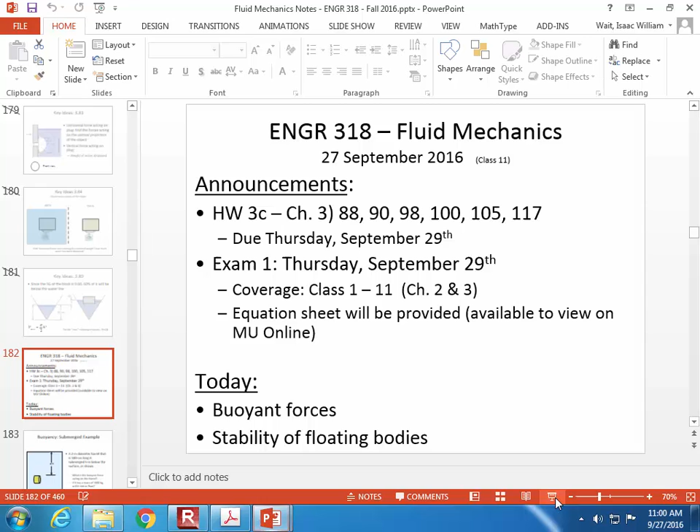You're going to have to squint a little bit more than usual. The fire marshal decided that having a few extra pieces of paper up on the window was putting us all at risk, so we're safe now. The fire marshal decided that with that much reduction in paper, we're not all going to burst into flames. So apologies if you can't see the screen.

Your homework assignment is due on Thursday, and also on Thursday we're going to have our first exam here in this room. It's 75 minutes long, and the equation sheet's already on MU Online if you want to have a look at that.

It's inevitable every semester I have students asking if the order of the equations on the equation sheet is some sort of indication of what you can expect on the exam. No, none of that kind of fortune telling based on the equation sheet will ever be successful. In fact, I haven't put the exam together yet, so I couldn't even tell you what's going to be on it. I'll probably be putting that together tomorrow. So yeah, it's as much a mystery to you as it is to me.

But it will be covering classes 1 through 11, so that's chapters 2 and 3 in the book. Any questions related to the announcements before we start talking about stability of floating bodies and a quick overview of buoyancy?

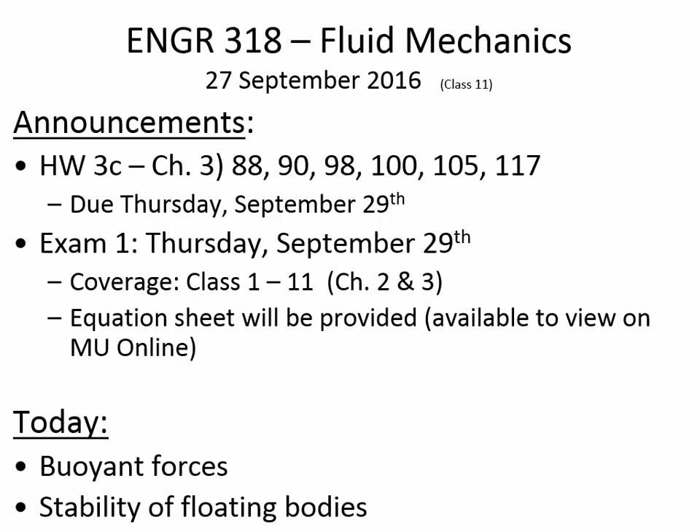All right, well the main idea with buoyancy is that it's related to the volume displaced. And then we can apply it to criteria like the weight of the object and the buoyancy to make decisions like, will a certain object that's in water sink or float?

Not every object is in equilibrium. Oftentimes if it's floating at the surface, then you can maybe, from the image, assume that it's floating, and it'll usually say it in the problem statement. But let's take this one as an example.

We have a barrel that's 2 meters in diameter, 180 centimeters long, and it's submerged 5 meters below the surface. Does it matter how deeply submerged it is? No. Why not, Stuart?

Because the wet portion is the same surface. Right, that's right. And so this is an example of information that sometimes you're given that doesn't actually play into the calculations. Just because a piece of information is given doesn't mean you have to use it in a problem. So the pressure on the top and the pressure on the bottom are both increasing the deeper it gets, but the difference between the two isn't increasing.

And so the only thing that's significant about that depth of 5 meters is that it's below the surface, it's fully submerged. So I'd like you to calculate two things. First, based on the dimensions of it and the fact that it's submerged in water—does it even say water? No. It's submerged in water. Let's assume it's water, temperature not specified. Will it sink or will it float?

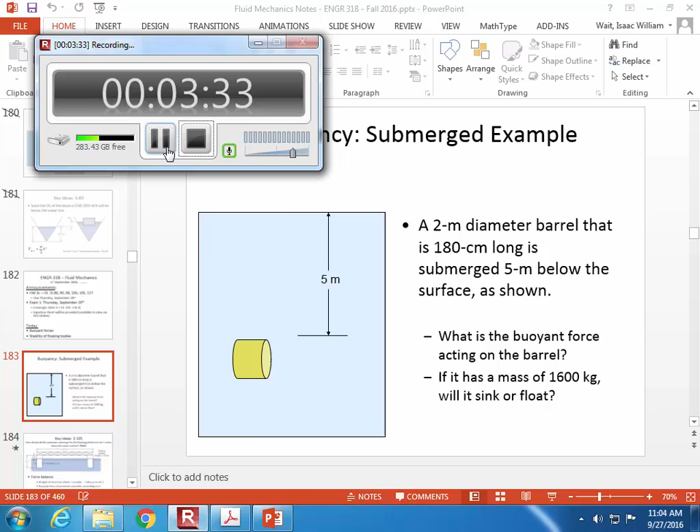All right, since buoyancy depends on the volume of the barrel, that's where we can begin. It's just the area times the length. And for a circle, the area in terms of d is pi d squared divided by 4, and we multiply it by the length of 1.8 meters since it's 180 centimeters.

And so we get the volume, and from that multiply by the unit weight of the liquid that's being pushed out of the way by the barrel, which in this case we're assuming is water. And so we get a buoyant force of 55,000 newtons, that's pushing the barrel up.

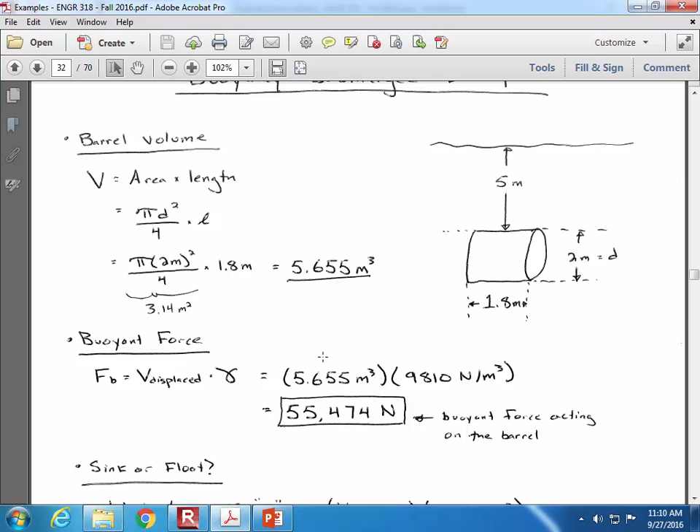Now the barrel itself has weight based on its mass, and so we can calculate the weight. It's just the 1,600 kilograms multiplied by g. So the weight of the barrel is less than the buoyant force, so that's going to mean that the buoyant force is pushing the barrel upward.

Another way of looking at it is just looking at the unit weight of the barrel relative to the unit weight of water. Kind of like how sometimes we consider the density of oil, and we know from the density that the oil is going to float on top of the water, just if the density of something is less than the density of water. And so in this case, the unit weight, which is related to density, is less than the density of water, or less than the unit weight of water.

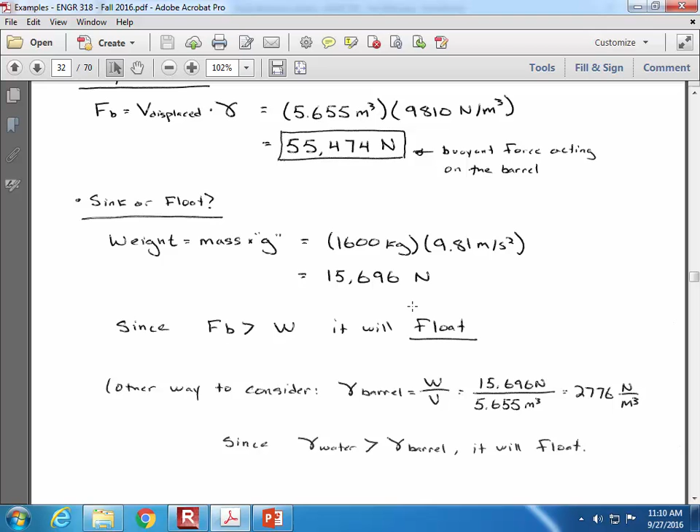One other idea occurred to me: does what we've just done tell us how quickly the barrel is rising to the surface? Because what we have is a difference in forces. The buoyant force is 55.5 kilonewtons up, and the weight of the object is 15.7 kilonewtons. So we have this equation, the sum of the forces equals ma. The sum of the forces here is that there's a net force upward. So is it just that easy? Could we use this to find out how quickly the barrel is accelerating upward?

It depends. This assumes there is no friction. As soon as that barrel starts to move upward through the water, think about viscosity and the resistance the barrel would face. It's not going to be accelerating in a vacuum. This approach would work if it was accelerating without any resistance, but in reality, the faster the barrel is moving, the greater the drag forces. As a preview of where you'll get to in the wastewater course, or whatever environmental engineering course it ends up being, you'll learn about the acceleration of particles through fluids, which is important in water treatment. So we can't just say we know how quickly it's accelerating, because the drag forces gradually increase as a function of the barrel speed.

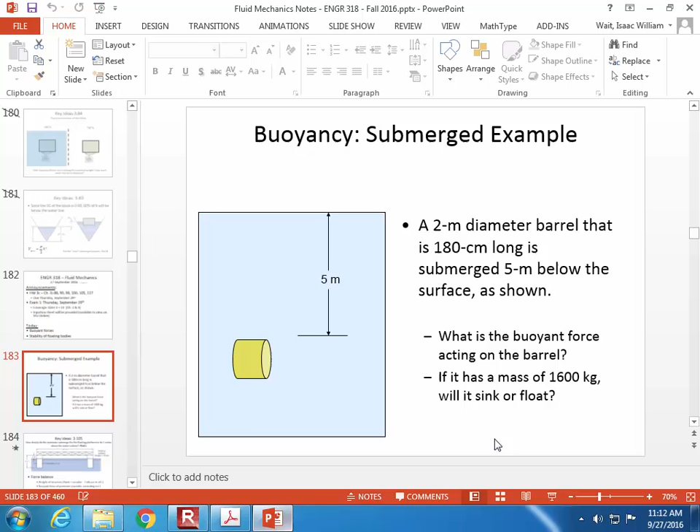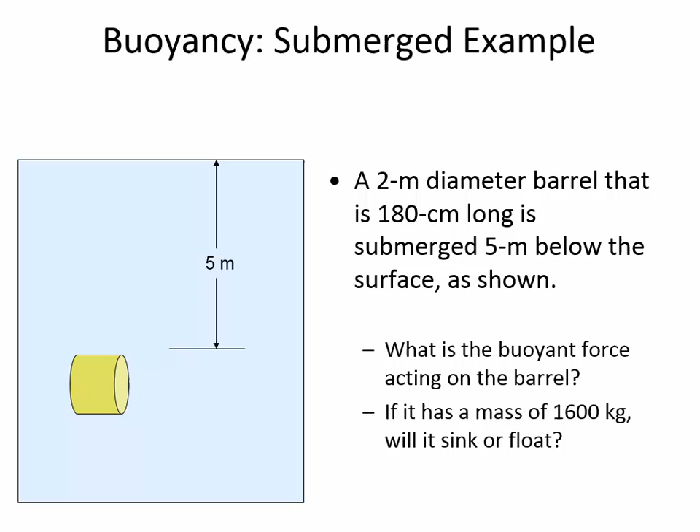But we do know that it's going to float until it reaches equilibrium. And if we wanted to, we could even calculate how it's going to be floating at the surface, although that would be a little tricky because of the shape of the circle. Any questions on the calculations you did to determine whether it would sink or float?

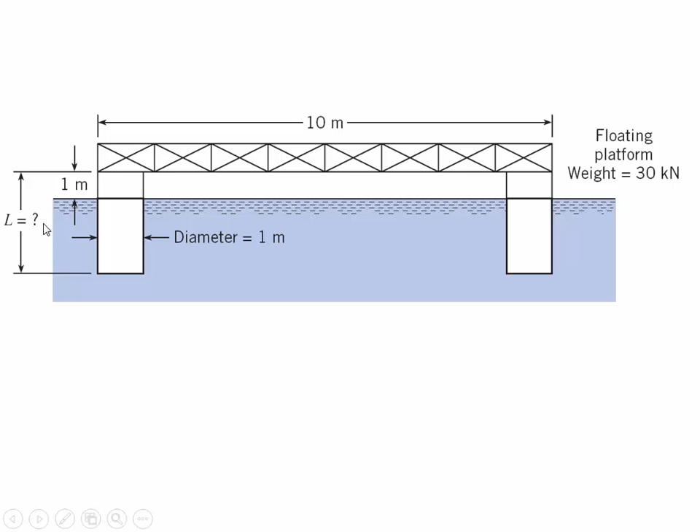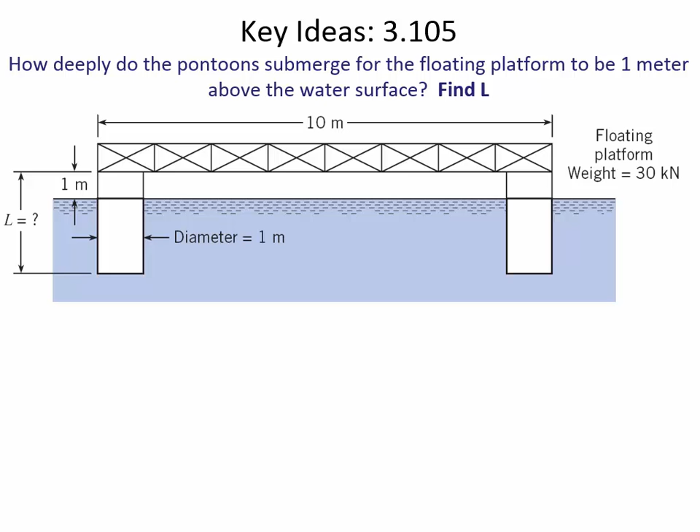So what the problem is asking, see the L here? They want to know how deeply submerged the barrels are, and from that, what is L. How long do the barrels have to be? If you want 1 meter of clearance, to be up above the waves a little so you don't get splashed, you're above the water surface by 1 meter. So how much submergence do you need below the water surface to keep this in equilibrium, so that you have enough buoyancy to overcome the weight of the object, so the buoyant force and the overall weight are in equilibrium? This is another one of those vertical force balance problems.

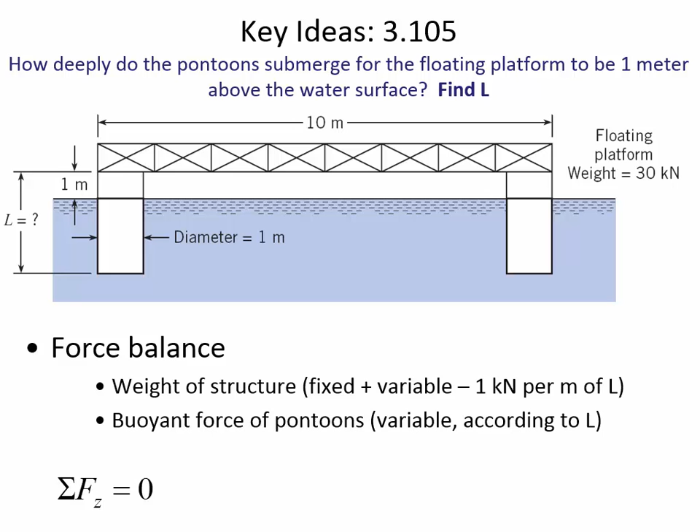You've got the forces up, which are buoyancy, and the forces down, which is the combined weight of the barrels and the superstructure together. I wanted to mention this problem since it's due Thursday, and it's always a little tough to see it as a 4-barrel object. It says so in the problem statement, but the picture doesn't make that immediately clear. Now that you've seen the picture, any questions about it?

So what we're going to be talking about today is stability of floating bodies—whether boats are going to tip over or whether they're stable.

Consider these two cylindrical objects. On the left is a submarine, and on the right is a wooden log the little boy is balancing on. They've got some similarities: the object on the left and the object on the right are both floating, both cylindrical, and both have people standing on top.

The one on the right doesn't have nuclear missiles in it. The one on the left does. But that's not the main reason why the sailors aren't dancing trying to keep their balance like the kid on the log. So any guess why the sailors aren't having trouble keeping their balance, and why doesn't that submarine just tip over? It's top heavy, right?

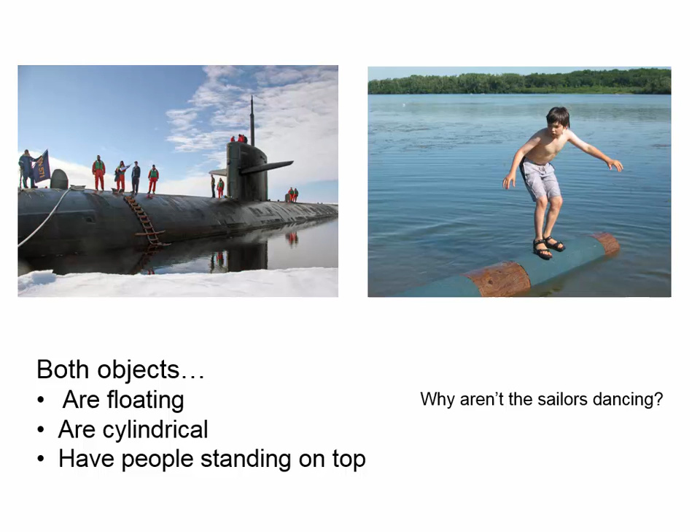Center of gravity, yeah. So not pictured is probably ballast at the bottom of the submarine—a heavy concentration of weight at the bottom is going to make it stable.

Here is a conceptual representation of that approach, where you can see from the weighting that what they've done is move G, the center of mass or center of gravity, below the center of buoyancy. The letter C means center of buoyancy.

And what determines the center of buoyancy and where it's located? The volume and the shape—the shape of the thing that's pushing water out of the way. Remember, buoyancy is all about water being displaced.

We've said several times the magnitude of the buoyancy is equal to the weight of the water displaced. It turns out that the location of the buoyancy is also guided by the water that's been pushed out of the way. So here, if it's a circular shape on the exterior, the center of buoyancy is the center of area of a circle, which is in the middle. That's why C is in the middle—it's the centroid of the water that got pushed out of the way.

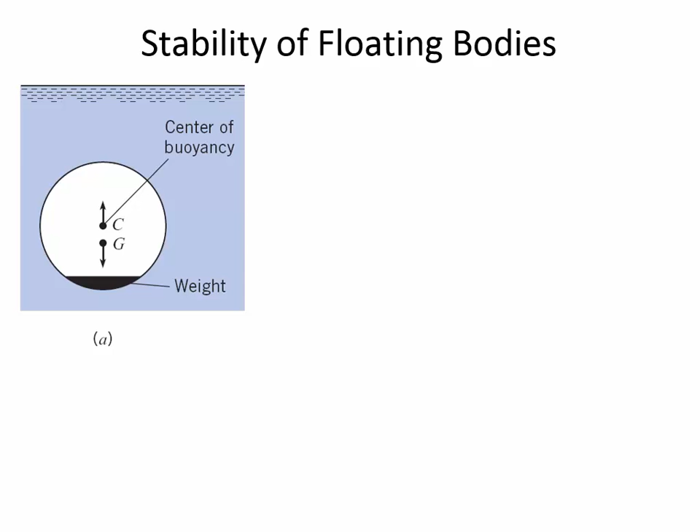But the center of gravity is more about where the average mass is—not only of the outside material, but all of the material on the inside of that water that's being pushed out of the way. So C is center of buoyancy, G is center of gravity, and you can see what both of those are related to.

So this is stable—Picture A is stable. Why is it stable? If you tipped it, what would happen? If I took that weight and rotated it so the weight was at the top, when I say that it's stable, what do you think that means?

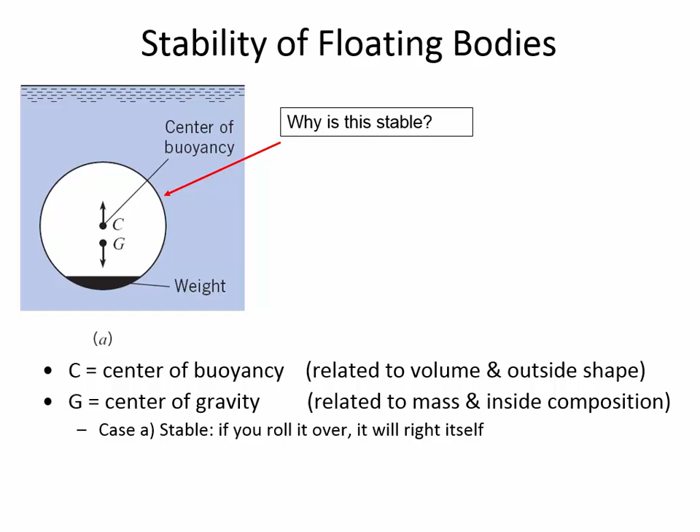It's going to go back to the original position, right? It's always going to have one preferred location with the weight at the bottom. If you roll it over, it will right itself. That's what we're calling stable—it doesn't mean it can never be tipped. All it takes is a certain force to rotate it out of its stable position, but it'll go back to stability.

B is neutral, so neutrally stable. That means it's not going to right itself necessarily, because the center of gravity and the center of buoyancy are in the same location. Object C illustrates what would happen from a vector standpoint if you did move the weight into its unstable position. So C is unstable as pictured, but because of the righting couple—here in italics, it's called a righting couple.

That means the direction of those two vectors is such that it's going to rotate the bottom, where the weight is located, back to the lowest part. Think about putting your left finger on C and your right finger on G, then pushing in the direction of the arrows, like on a piece of paper, left hand up and right hand down, which would rotate the paper. Those forces act in the direction indicated: the buoyant force acts up, and the gravitational force acts down. These arrows represent the forces and their direction.

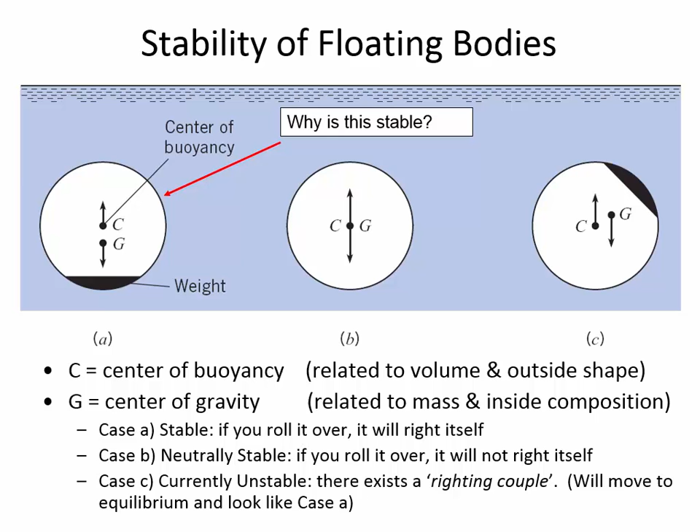So the buoyant forces act up, and the gravitational forces act down, but what if the ship tips over, maybe because of waves or wind, or because it's been loaded incorrectly?

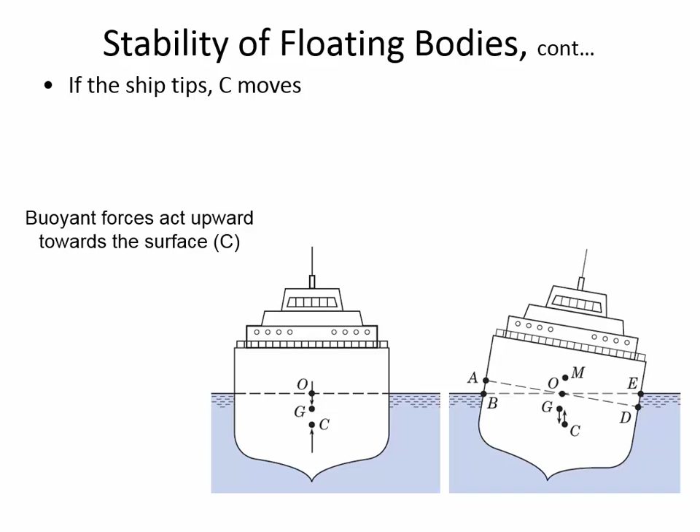So if the ship tips, the center of buoyancy C moves, and the metacenter is the point of intersection of all the lines of action from the buoyant force. In other words, C points toward the metacenter.

And this is stable because of the righting couple. If the ship tips a little bit, if it heels, then the center of buoyancy shift is just going to push the boat right back into its original position.

Now, if there's lots of waves and lots of wind, then it's going to be rocking back and forth, making us all really sick. So they do have thrusters on cruise ships to sort of keep it from tipping over, just for the comfort of passengers, but they're not necessary to keep the boat from sinking.

So there are a number of calculations that we can do about all this, and ships are designed not to tip over, and there is kind of a numerical way for us to analyze the risk of whether a ship will tip over or not.

The criteria that we can apply is that if M is above G, so if the metacenter is located higher than the center of gravity, then the object will be stable. So that's our criteria, if M is above G.

So if I put a lot more containers on top of this ship, what would that do to the location of G? It would move it up. Why would it move it up? Why would it move the center of gravity up if I loaded more and more cargo on top of the ship?

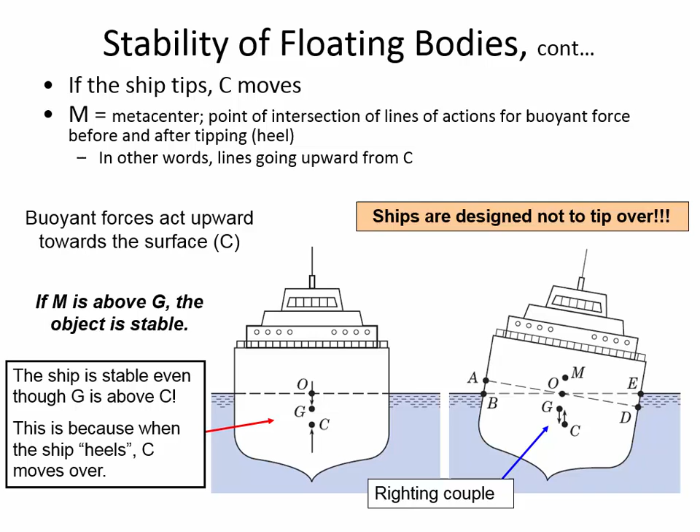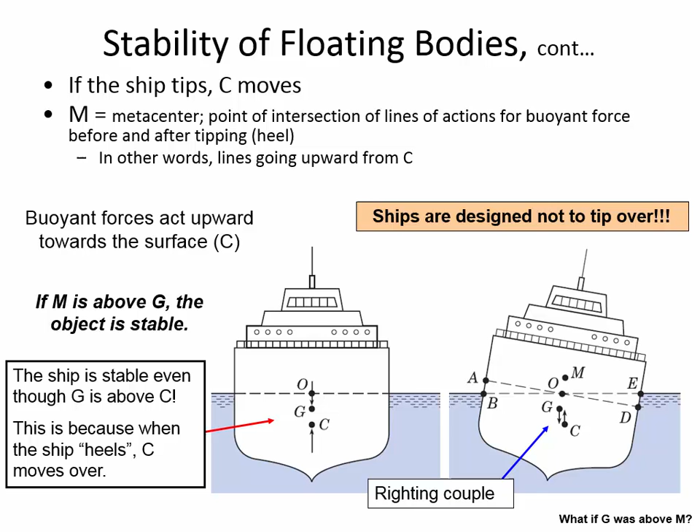So if G is above M, then the ship tips over. And that's the analysis that you need to do.

Now, in performing that analysis, one of the things we have to come back to is the idea of area moment of inertia. And for a ship like this, it's a barge.

It just looks like it's rocks. It would be more fun if it was a garbage barge, because that kind of rhymes a little bit, garbage barge. There's always famous movies of cars going off a bridge and landing on the garbage barge. But the garbage barge never tips over, because of the stability of floating bodies and all that.

When you calculate the area moment of inertia, you will assign the parameter B to the shorter dimension. So this is rectangular, so you'll notice in the area moment of inertia formula, you're cubing one of the parameters, and one of them you're just taking to the first power.

And so, why is that? It's because it's more risky for it to tip over about this axis. If you think about what's the greater risk, that it's going to tip over and sink this way or this way, you cube the critical parameter, the shorter of the two dimensions.

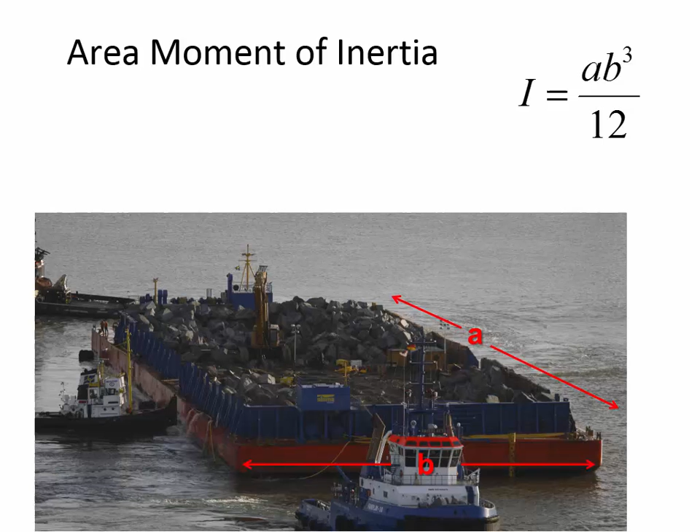And that's why on a boat, it rocks side to side more than it does front to back, because the side to side motion is affected by the boats being less wide than they are long.

So once you have the area moment of inertia for a boat, that's a top view thing. You get it from the shape that is formed at the water line. So, in other words, the top view defines the shape of the water line.

Here's the formula for calculating GM. And GM is the distance, how far apart the center of gravity and the metacenter are.

And so you have the area moment of inertia, I, divided by the volume, the submerged volume. So that would be the volume that's generating buoyancy. So the bigger this first parameter is, the more stable the object is going to be.

Because what we want is a GM that's positive. If you have a GM that's negative, that means it's going to tip over and it's not going to be stable. And so the thing that promotes an unstable situation is when you have a big CG.

And so CG is just the distance between the center of gravity and the center of buoyancy. So, for example, loading a lot of cargo high on the ship is going to raise the center of gravity, and that promotes instability.

Well, what promotes stability? A really wide barge. The wider it is, the less likely it is to tip over, because we're going to have a large area moment of inertia.

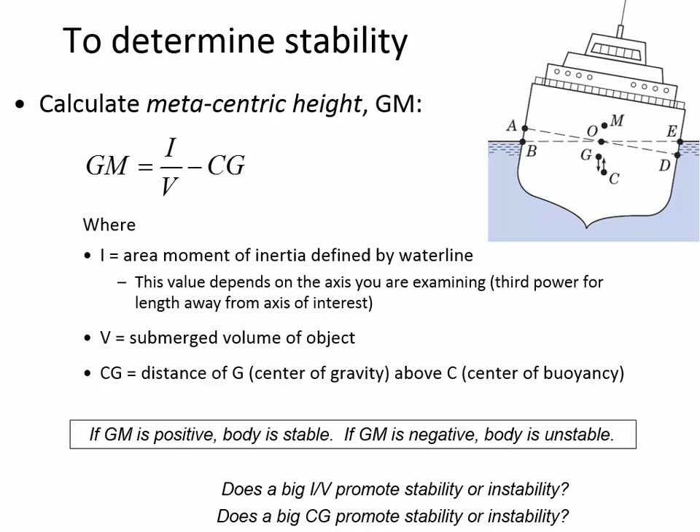So does a big I divided by V promote stability or instability? Well, it promotes stability because it's the first of the two parameters, and when it's positive is when we have it stable. When it's negative, we have unstable.

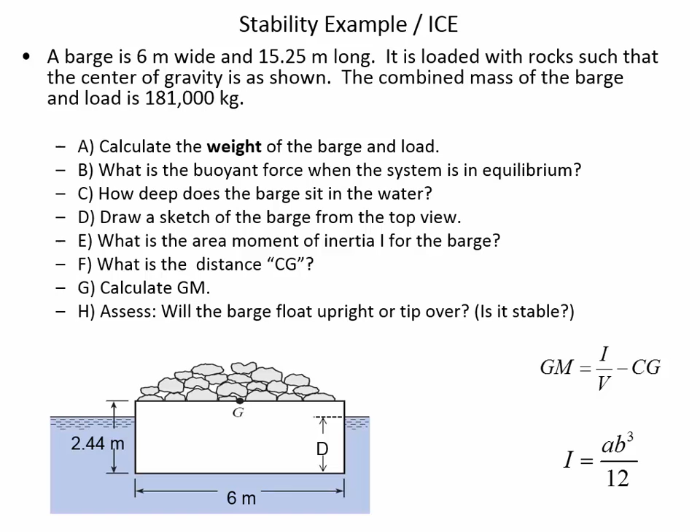So the first thing we need to know is, what does it say? The weight. And so the weight of the object is just the mass multiplied by g, and that's about 1.77 meganewtons.

And because it's floating in equilibrium, that means the buoyant force and the weight are equal. So the weight and the buoyant force are the same, and from that, saying that the buoyant force is equal to this quantity, we can solve for the submerged depth.

So we know the unit weight of water. The only parameter that isn't known is the depth, because the width and the length are fixed - it's just how deeply it's going to sit in the water. From that, we can find D is 1.978. As I walked around, it seemed like everyone was honing in on that same value.

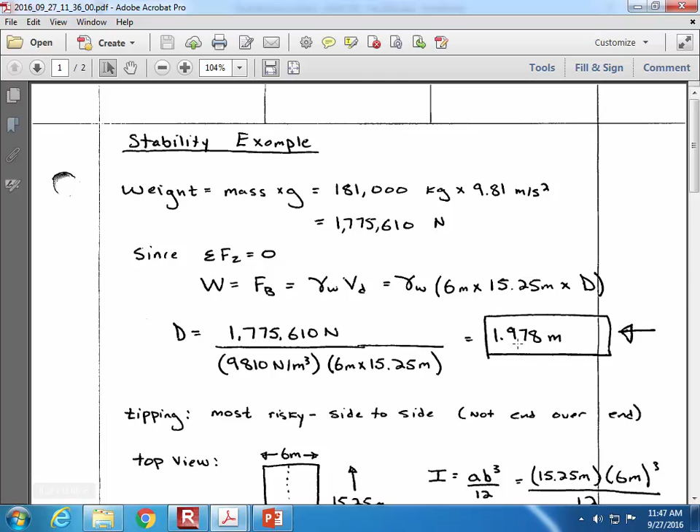Okay, the thing to look at now for the area moment of inertia is what is A and what is B. Its likely axis of rotation is going to be, because of this 6 meters being the narrower of the two dimensions, it's more likely to tip this way. So we're going to cube that parameter and then just take A, which is the length, to the 1 power. So here we get I for the area moment of inertia.

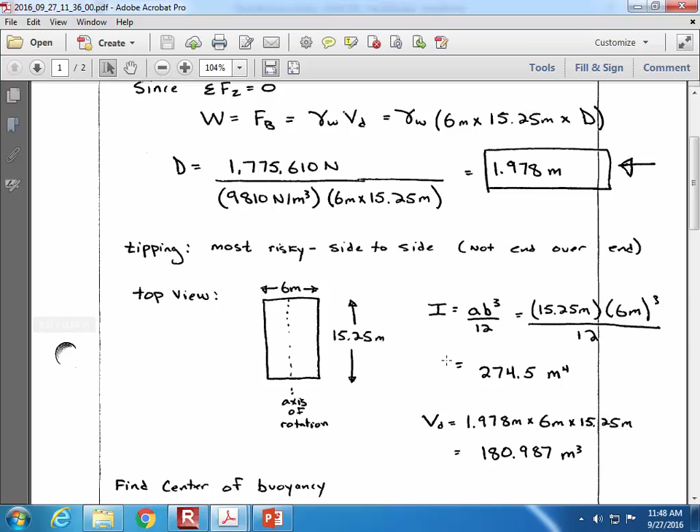The submerged depth - the next thing is to find the center of buoyancy. So for the center of buoyancy, we have to take that depth, the submerged depth of 1.978, and divide it by 2, because that will tell us where C is. C is half the distance from the bottom to the waterline, so halfway is where the center of buoyancy is.

And then we know how deeply it's submerged, and we also know the overall height of that object - it's 2.44. That allows us to calculate from the waterline up to G. And you add those two lengths together, and that's where you get the CG distance, 1.451.

And then from there, it's just substituting everything in. And the criteria is if you have a positive GM, then that means it's stable, and that's what this one is. This is stable, just barely stable, though.

It would be pretty easy to make some changes to this barge, and then it's at risk of tipping over. If it was negative, then it would be unstable, and that's the one that at the first sign of a wave, wind, or someone walking around on the deck, it's just going to tip right over.

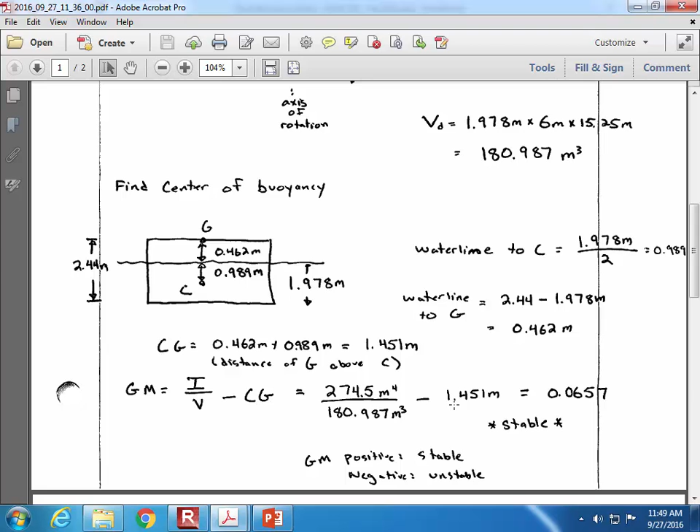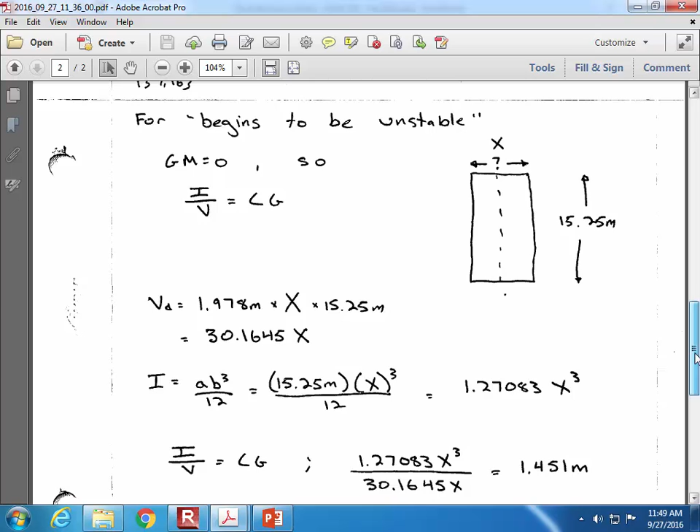I think I had a second part of the problem where I asked how wide would it have to be for it to be unstable. So I went through that process, and I found that all we would have to do is make it a width of 5.87 instead of 6, and then that would be narrow enough that it would now be unstable. So that's one of the things you could do to make it unstable.